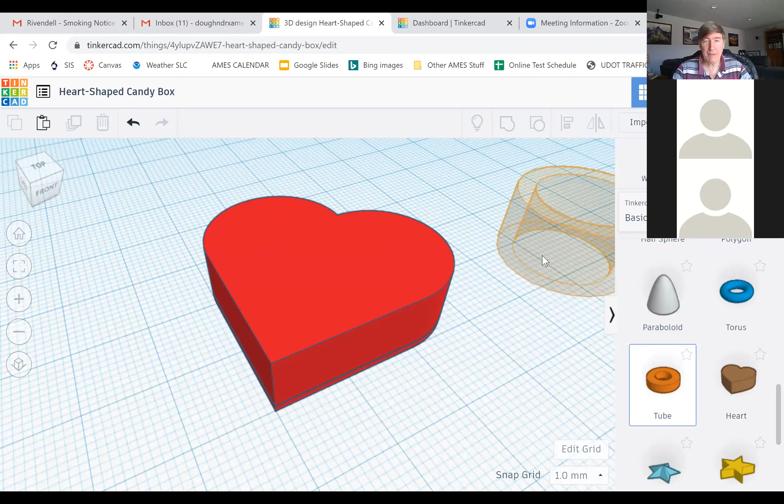So tell you what, let me go here. All right, so this right here is an object I'm going to be talking about in just a few minutes. But let's modify this - let's say I bring in a couple more objects. Let's bring in an object like this, and bring in another object - maybe a roof type object. Let me scan back here. Okay, so now I have a heart, a ring shape, and a thing.

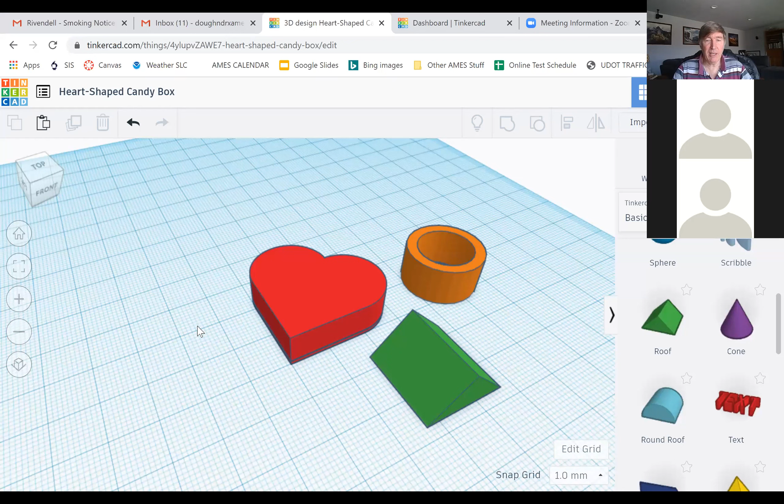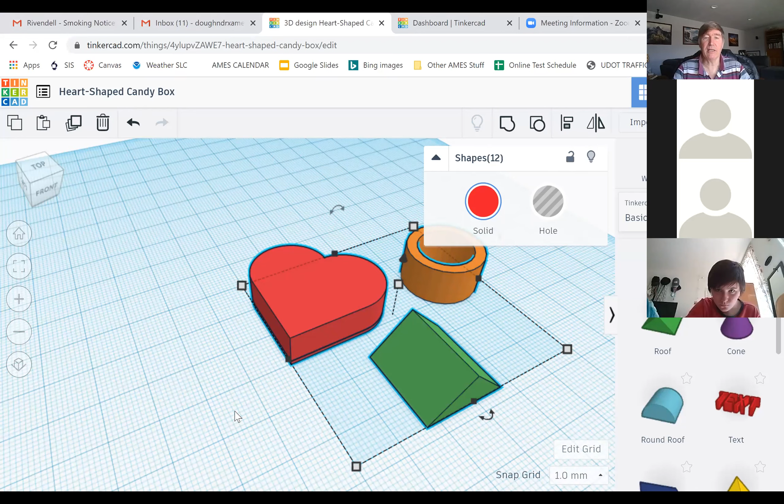So one way I could select multiple objects is to click on this one, hold down the shift key, click on this one, hold shift, click on that one. So I've selected multiple objects. But there is another way: just come up here, click and hold down the click key, like Danny was suggesting, and then drag. When I let go, it has selected all three of those objects. That's another way to do it.

Okay, let me go back to my original thing here. Let's see. Oh, how did that get over there? Okay, hang on a sec, my computer is doing a funny thing.

How do you change the viewing angle in CAD, in Tinkercad? All right, so both of the options I've listed there will both work. You can right click on the drawing and drag around, or you can click on the left square up there. Let me switch back to the other screen here.

Let's go back to this screen. Say I want to change the viewing angle. I have a mouse here, and I'm going to right click it and drag it around. You guys can see I can change the viewing angle to whatever I want - right clicking and dragging around. Now my mouse has a wheel on it, so if I go this way I can zoom out, and if I go this way I can zoom in.

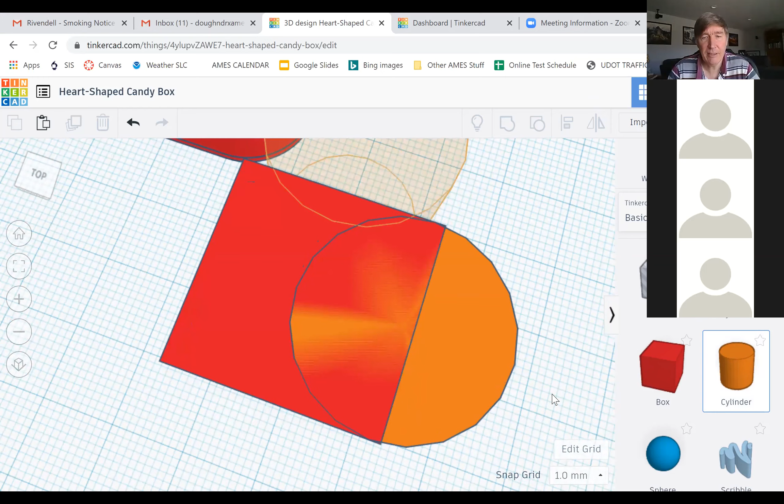Now I'm going to bring in another cylinder. Here comes the other cylinder, and I'm going to bring it in like that. Let me zoom back a little bit. Okay, so now I'm going to bring the cylinder in so it fits in like that.

Okay, all right, so hang on a second here. Yeah, there's a lot of lag. I agree that the lag is pretty bad there.

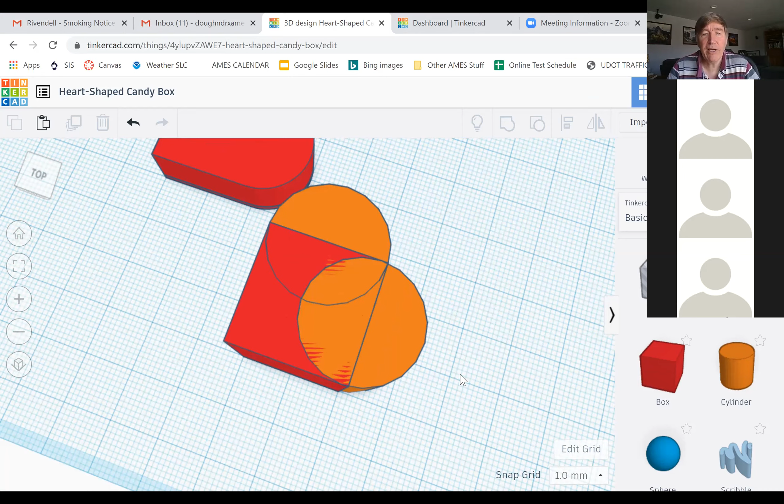All right, so now I've got a box and two cylinders, and now I want to select all three of them. So I'm going to click, I'm going to drag, and oh, you see what happened there? I got the original heart. I didn't want the original heart.

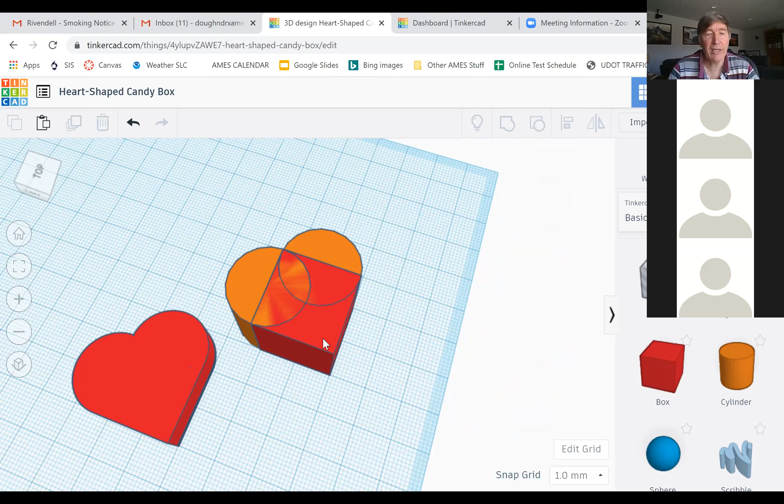Okay, so let's do this a little differently here. Let's see if I can come over here. So I'm going to click and drag, and let's see. Okay, I don't want to mess up my original heart there. So let's do it the other way. Okay, so I clicked on the box, I clicked on the cylinder, and now I clicked on the other cylinder.

Okay, so now what I want to do is group them together. So you guys see right here, this thing that when I hover over it says group. I'm going to click on there. So I've grouped them together, and notice it now colors them all the same. The default in this case just happens to be red, which is coincidentally the right color I wanted.

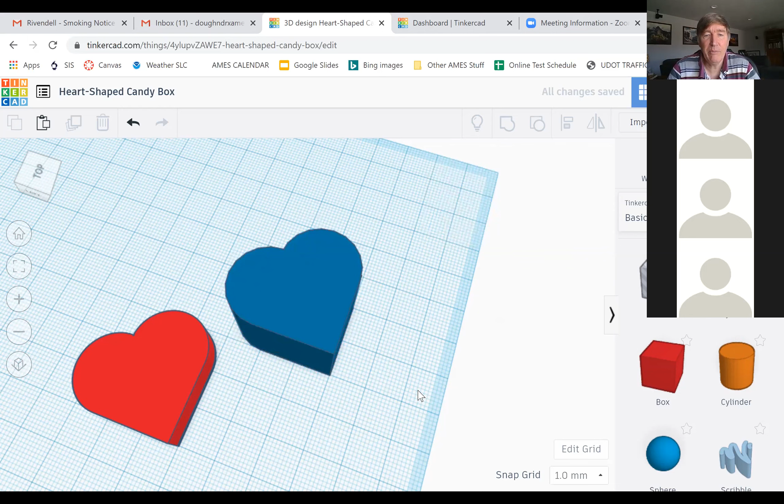But you guys know, of course, that I can make the heart be any color that I want. So let's make this guy be a blue heart. Okay, so I have now created a heart from scratch.

Okay, now it's a very tall heart, probably taller than I want. So if I click on it, you get the little arrows here, so you guys know how you can change the height to whatever you want. Also notice that the numbers appear, telling you how high it is.

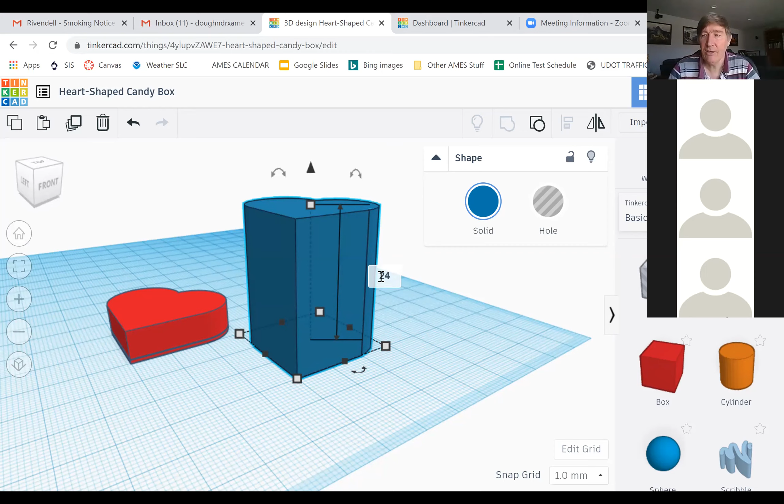Let's say that I don't want it to be 36 millimeters high. Let's say I want it to be 24 millimeters high. So I can just click on that box there and hit enter, and it automatically makes it be 24 millimeters high. I can lift it up above the plane if I want, and bring it back down again.

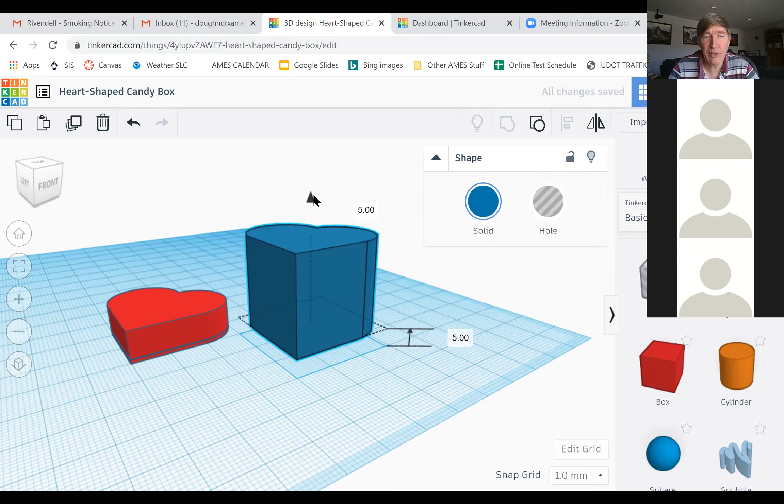And this number that you see right here tells me how high above the working plane I am. Okay, so I'm going to bring it back down. I'm going to put it right on the working plane.

Okay, so now what if I want to make it be a hollow heart? Somebody suggest to me - this was not something you did in your homework last night, but I'm sure some of you know. Let's say that I want to make it be a heart-shaped box. How can I make the center portion of my heart be hollow? I'm going to sit back and wait.

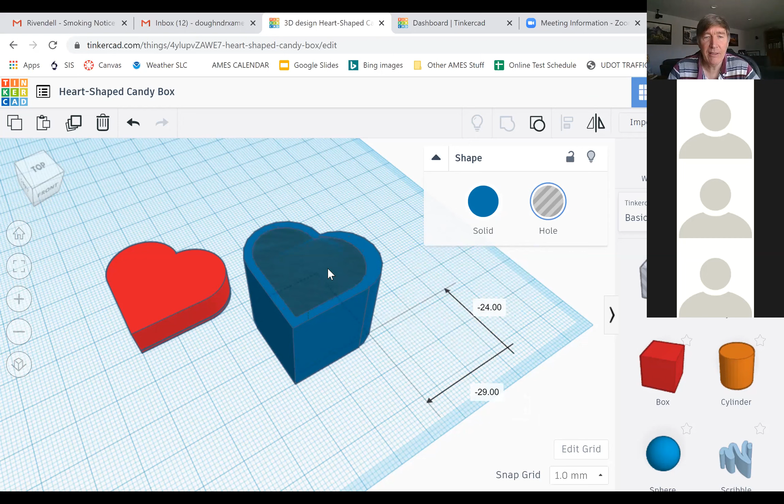If I click on this, it now becomes a heart-shaped hole, which if I then click on here and drag it back into there, now I have a heart-shaped hole inside of my heart, but it doesn't look like a hole yet.

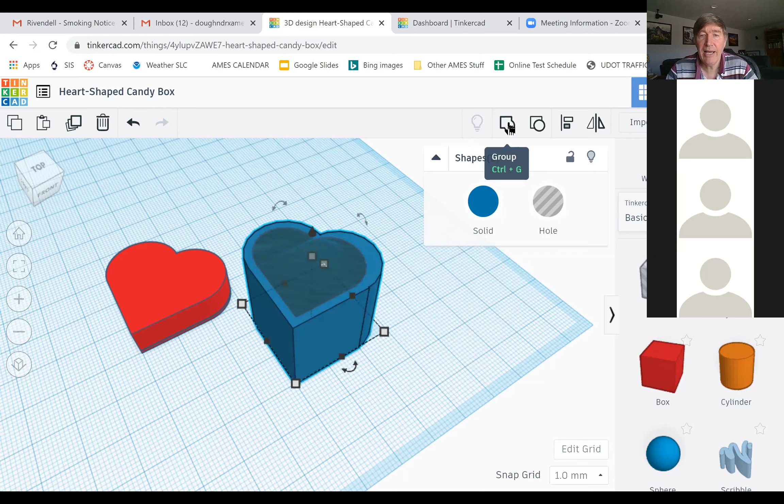It's not going to look right until I've selected the hole, and now I'm holding down the shift key and clicking on the outer one. So now I've got both the hole and the outer one selected. If I come up here, I'm hovering over group. Now when I click on group, there we go. Now I have a heart with a heart-shaped hole inside of it. You guys see how that works?

Mason is suggesting that if I hold shift as I scale, it scales proportionally. Good, very good hint, I'm glad you mentioned that. Yes, if you hold shift at the same time you're resizing something, it'll size it proportionally, because otherwise it might be a little bit elongated one way or the other. Good input. So now I have a heart-shaped hole.

Well, yeah, okay, but how about if I do this? I'm going to click on this and lift it up above the ground now. So now do you see the problem with my heart-shaped box? Yeah, Aaron's exactly right, or Van I guess, and John's got it too. Yeah, if I put the candy in the box here, the candy is just going to fall right through. That's going to be bad.

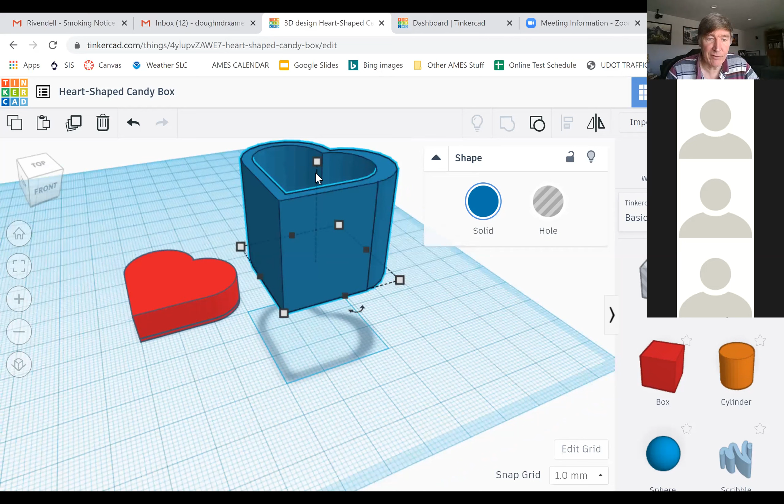All right, so let's put the box back down on the work plane. Not that I have to, but I find it a little easier to. So what I need to do now in order to prevent that.

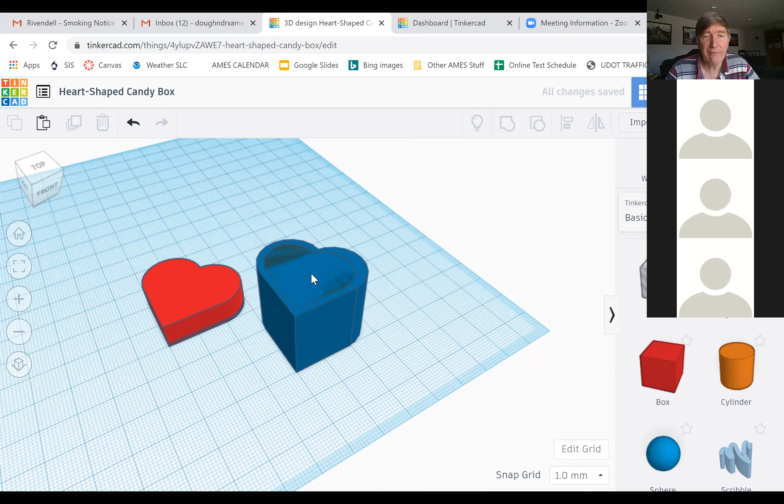Let's go back to this and I want to ungroup it. Right now I'm hovering over the thing that says ungroup, so I'm going to ungroup it. I click over here to unselect everything, now I've clicked on here. This time it's not obvious I'm looking at it, but I'm only clicking on the hole this time. So what I'm going to do this time is take the hole and I'm going to lift it. Oops, it looks like it clicked on the wrong thing.

I got the box there. I wanted the hole. Okay, so let me come over here and undo that. By the way, this undo command is really nice.

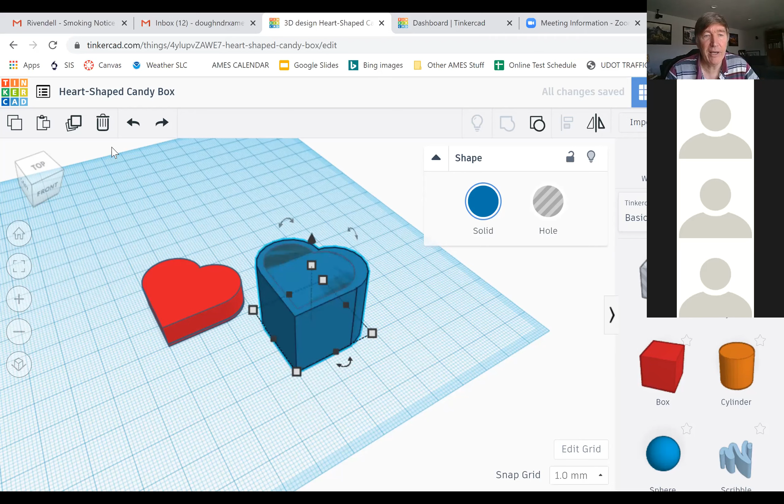I want to click on just the hole and not the box. Okay, this time I got the hole and not the box.

Now let's lift the hole up above the ground. Can you see how the hole has now been lifted up?

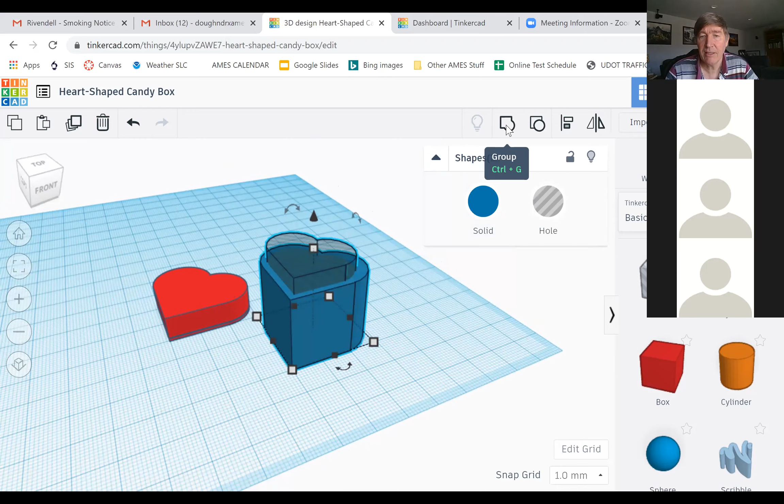Now when I hold shift and click on the outer box, I'm going to regroup everything. Now you see my problem has been fixed, so the hole does not extend all the way through. If I look at it from the bottom here, you can see I've actually got a bottom on my box now, so I can put candy inside my box and it won't fall through.

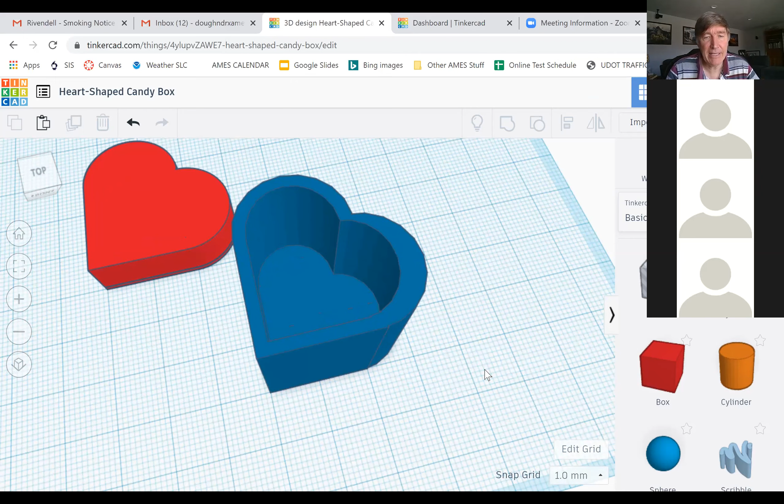Now, how did I create my candy? Let me move over here so I have a little more space. Let me show you how I created my candy. What I did was I just took a regular old box and dragged it into here.

Let me change it here. Notice that when you create a box, it opens up this window with these options that some of you may not have played with.

This option on top here that says radius - look what happens to the box when I play with that. I can take that box and change it all the way into being a circle by changing the radius of curvature. So I'm going to put it somewhere in between here.

What it does now is takes the box and rounds off the corners. If I want to go extreme, I can round them all the way to where it's no longer a box anymore - now it's a circle.

But if I come back here, now it's a box with rounded corners. Now go ahead and play with these other things - you see the steps here? I can, if I put it like here, you can see it goes in one step.

So if I bring it all the way here, it's perfectly rounded. Over here, it's perfectly rounded. Come back over here, and it's less so.

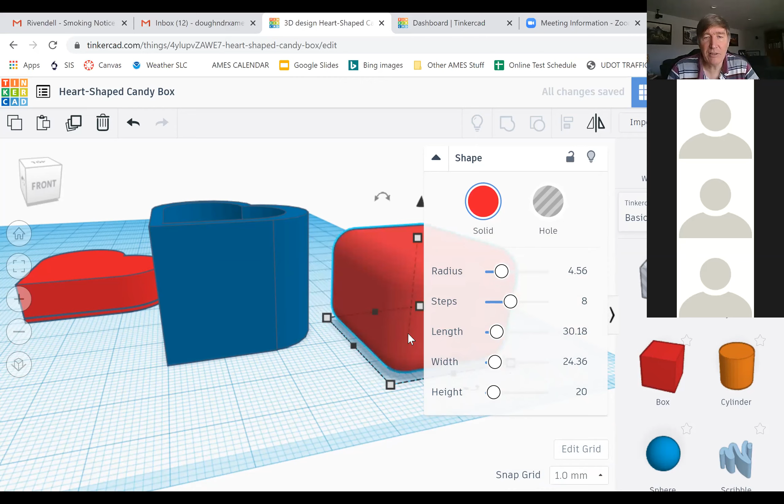Length here - you can change the length of the box this way, or you can click on these handles down here. Width, you can change those too. I find it's easier to click on these handles and change them this way, but you can do it any way you want.

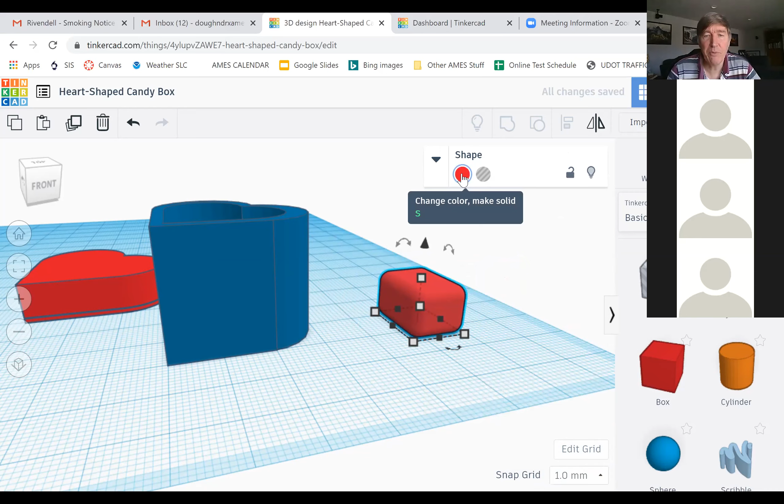Now I've made myself a, let me get rid of this shape here, I don't like that - now it's easier to see. So I've made myself a piece of chocolate, except it's red chocolate. I like chocolate to be brown. In fact, I like dark chocolate myself.

Let's click on this one right here, let's make it be dark chocolate. Okay, now I've got a piece of dark chocolate to go in my box.

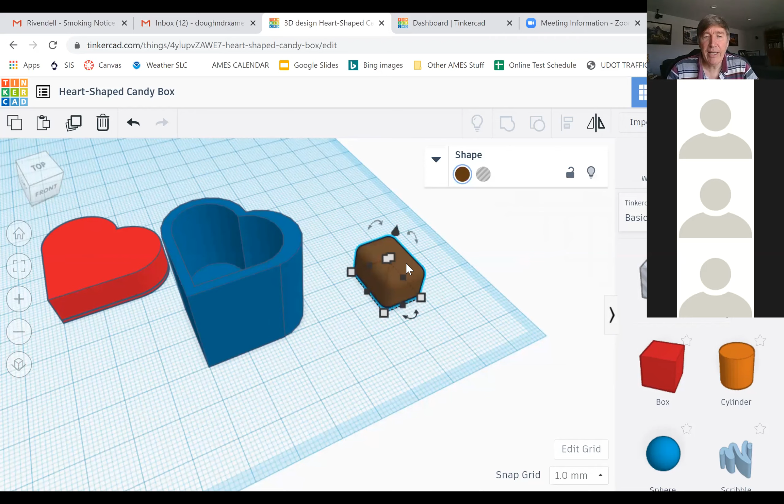So how do I get it in the box? Well, I've clicked on it, and what I can do now is just drag it. Now this is kind of interesting - see, look at this, I'm dragging it right through the wall of my box here.

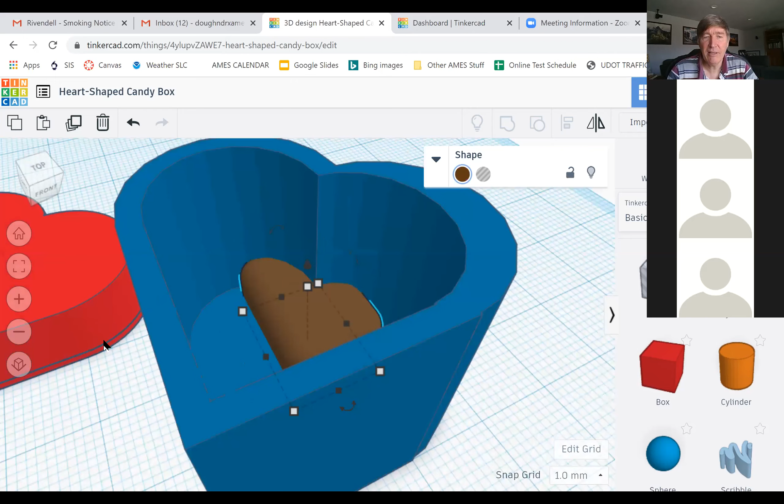So if I leave it like that, let me come here and center in on that. Okay, so my piece of chocolate is halfway in the box here.

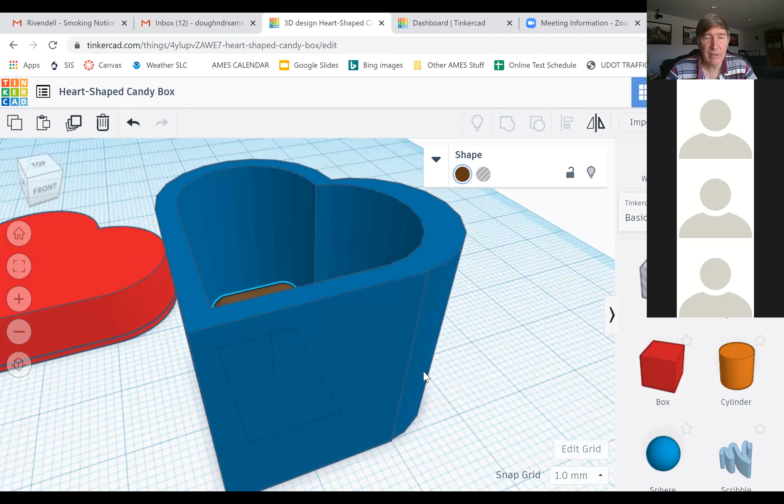Let me bring it the rest of the way in, and let me change my viewing angle here. Now it's inside the box, but it's actually fused with the bottom of my chocolate box here, so let's lift it up a little bit.

Also it's a little bit bigger than I'd like, let's size it down. Okay, so bingo, I've got a piece of chocolate inside my box now, right? So you guys see how I did it.

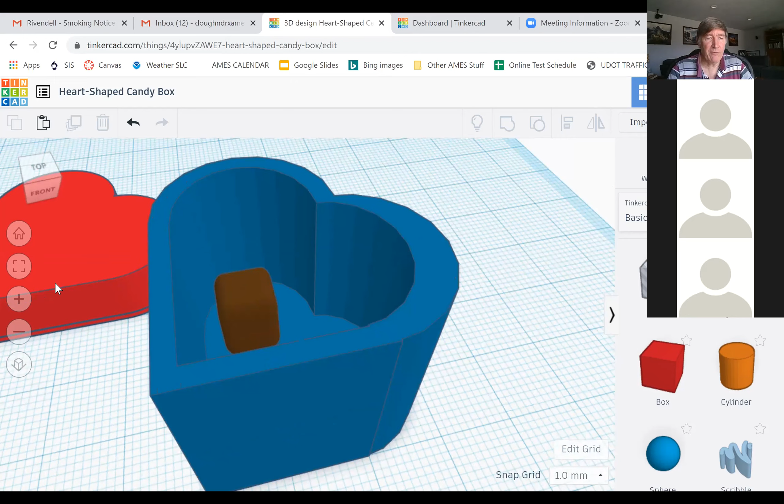Now let's come over here and focus on the actual candy box. I'm lifting it up here, let me zoom out a little bit.

Okay, so I'm sure you guys can figure out how I made the lid here. That one, the lid is actually easier. All right, the lid was really very easy to make, so we don't need to talk about that.

So any questions about what I just did there? I think it's all pretty self-evident, but okay, so no questions from David. Okay, John, all right, good.

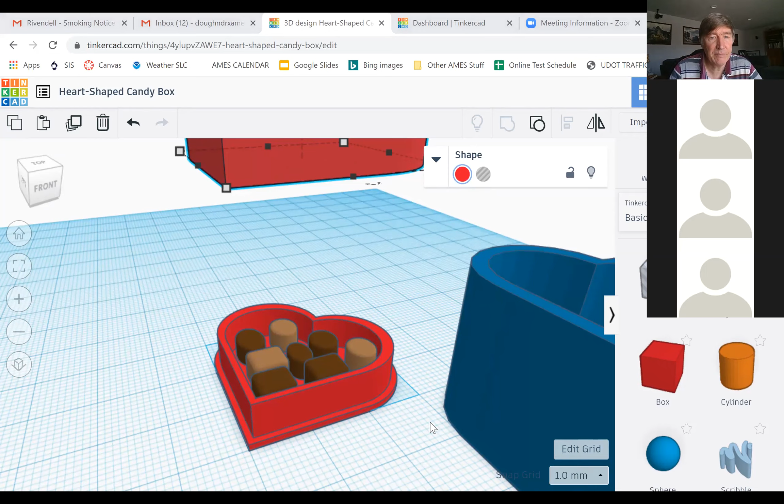Okay, so your homework tonight is basically just play with Tinkercad and create something of your own. Let me come back here to the... okay, all right, so I'm back into my PowerPoint presentation.

Okay, so your homework tonight is to draw something in Tinkercad more sophisticated than we did last night. Please don't copy what I did, come up with your own creation. If you want to do a box with something in it, that's okay, but you have to have two things to fit together. So if you draw a box, make sure that you draw a lid where the lid fits on the box, similar to what I've done right here.

So whatever you draw, it must have at least three pieces, three different parts, okay? And the parts need to fit together.

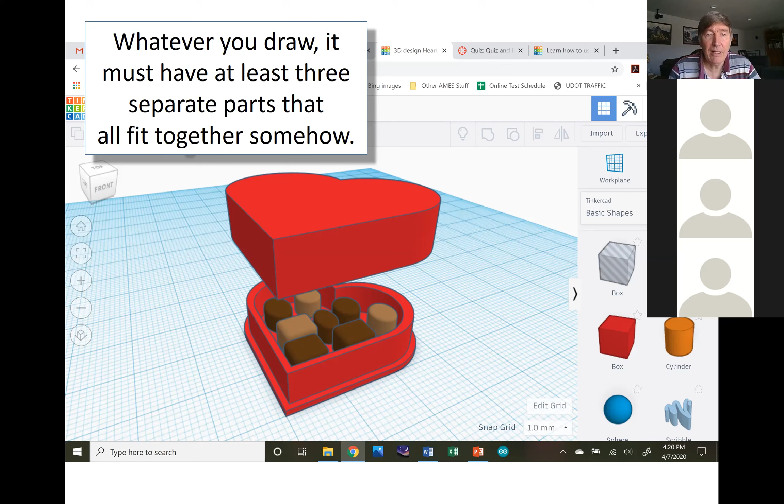And another important part of the requirement is that everything you draw needs to have been drawn using Tinkercad's basic shapes. You are not allowed to import any complicated drawings that anybody else has drawn. Now, next time we meet, we are going to learn how to import complicated drawings. It turns out it's really easy, but that's not today, that's next time. So for today, everything that you do has to be just with the basic shapes only, no imported drawings allowed.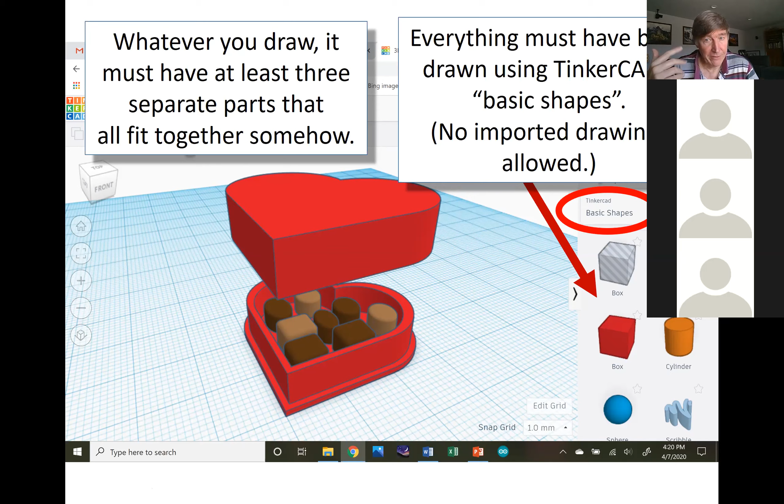Okay, so the basic shapes are the ones that you see over here. Remember that it's not just these 6 that you see here, you can scroll down and there's actually quite a few basic shapes. You don't have to stick with just these 6, okay? But go ahead and make something there.

And I will give you bonus points if you can make me say wow. If you can do something that is so cool that I look at it and say wow, I'll give you a couple of bonus points. So it's possible instead of getting 10 points on tonight's homework, I might give you 12, okay? But you've got to make me say wow. So use your creativity, come up with something of your own design, something fairly complex.

So David is saying, turns out it's really easy. Yes, it is, Tinkercad is wonderful. So those of you that know SolidWorks, you know that SolidWorks is a better program, it can do a lot more. But as I said last time, because SolidWorks can do so much, it's more difficult to learn. Whereas Tinkercad here is incredibly easy to learn, and as you can see, you can do some really good stuff with it. I mean, for 99% of the people in the world, Tinkercad can do everything that you're ever going to need. It's really only the professionals that need SolidWorks.